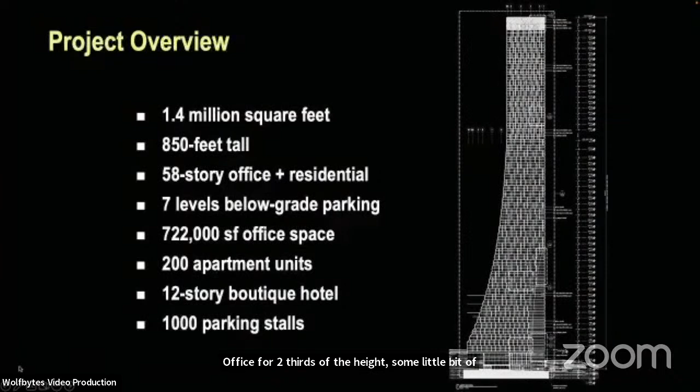The building itself is very large. In Seattle, it's the second tallest building. It's a mixed-use building with apartments on top, office for two-thirds of the height, a little retail in the base, and then 1,000 cars below grade, a huge parking garage. We could do a whole seminar on the below grade construction alone, but today we're going to focus on the above grade construction, which is the SpeedCore project itself.

How the building's organized is much like any other office building. Here you see a low-rise typical floor plan, where the red color is the core of the building, the structural backbone that braces it against wind and seismic loads. Let's talk in feet. The core itself is about 40 feet wide, and each of those red boxes is 40 by 30, with 3 of them, so 40 by 90 in totality at the base, housing the elevators, stairwells, and toilet rooms.

As the building gets taller, the floor plate shrinks, and with it, so shrinks the core, and so on to the top of the building, where we're left with a singular concrete box that's 40 feet wide and 30 feet long. This is how the building was to stack, apartments on top and office below.

That core by itself, at 850 feet tall, wasn't going to be stiff enough to brace the building. So in addition to the core, we introduced a series of outrigger trusses and belt trusses located about two-thirds of the way up, at the intersection of where the office stops and the residential apartments begin, at some mechanical floors. That was a convenient place to put these outrigger trusses.

The analogy I like to use for how the outrigger trusses work is like ski poles for a skier. If you're going down the mountain with no poles, you can make your way down, but it's a pretty wobbly ride. If you put the ski poles out, you feel a lot more balanced and stable. That's what these outrigger trusses and the columns that support them do, they add a lot of stability to the building. So that was the basic geometry of the building.

How buildings have been built for the last 30 years in many places around the world is using a reinforced concrete core surrounded by steel floor framing.

There's a long history as to why that is. We don't have enough time for that story today, but for most of my career, for the last 30 years, this is how we've been building high-rise buildings: concrete core, steel floor framing.

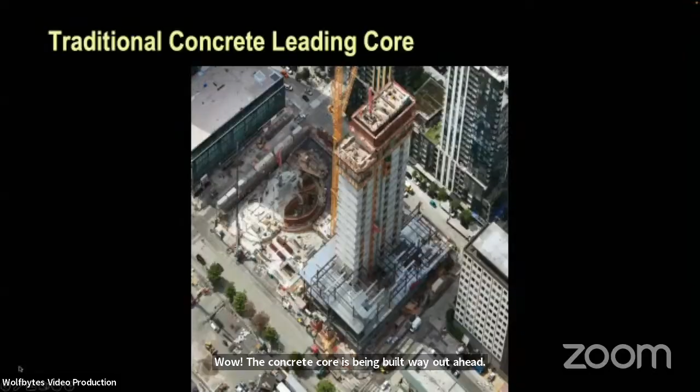That was the fundamental question of this project, because that time lag exists since the concrete formwork cycling and construction of the core can proceed at about one floor per week. That's about as fast as you can build it. The steel erection, on the other hand, can go 2 or 3 floors a week, much, much faster.

So there's this lag between when the steel begins erection and how far ahead the concrete needs to be. This was the question we asked ourselves: how do we address this and make the building go faster, squeeze that time lag out of the system with some other approach, and allow us to save several months on the schedule.

Confounding that concrete-ahead issue was this connection between these trusses and the concrete core. If you think about how to connect these very large steel trusses back to a reinforced concrete core, through the core, across the core, and then to the trusses on the other side, the amount of embedded steel needed in that reinforced concrete wall is substantial. The amount of time required and the complexity of assembling all that on site was substantial too, again confounding the construction process. So that's where we had this idea.

The idea was a composite plate shear wall system that was concrete filled. This was before we had the name SpeedCore. Actually, we borrowed this idea—we didn't really invent the technology. We borrowed it from a group that originally came up with a product in the UK called Bi-Steel.

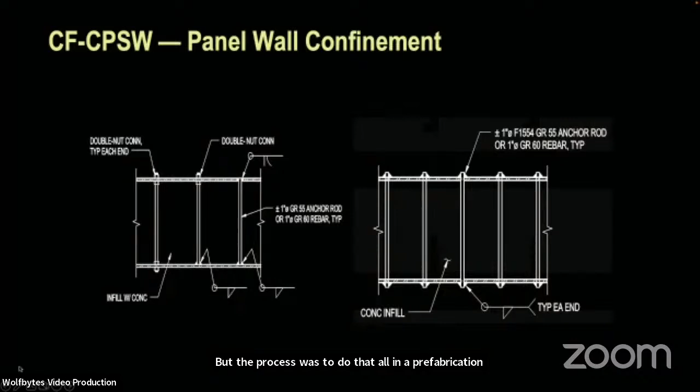The basic assembly you see here in plan: there's a steel plate, and they're interconnected by these tie rods. How you go about making that becomes really important because there are many, many pieces involved here, but the process was to do that all in a prefabrication plant—modularize it, prefabricate it, and then erect it in the field as you would stacking Lego blocks.

The panels themselves, as we imagined, were one story tall and one bay long. So in this case, 14 feet tall and 30 or 40 feet long, such that you could prefabricate them, put them on a truck, ship them to the site, pick them up with the crane and set them in place.

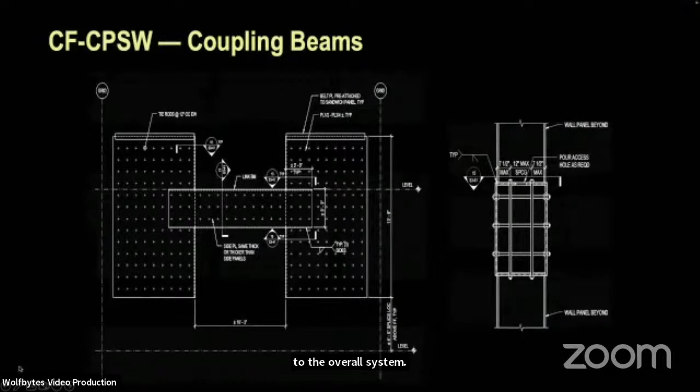Some of the other panels in the building needed doorways in them. So we thought about how we might create panels with doorways, and this was what we came up with: a dog-bone shaped or H-shaped panel that incorporated a link beam. As structural engineers, we were very concerned about how the link beam is constructed, how it will perform, and its contribution to the overall system. We wanted to control that very tightly, but how all that geometry came together was very important.

And then finally, how are we going to connect these pieces together in the field? How would we splice one panel to the next panel? Lots and lots of thinking went into all of these basic ideas.

About the time we were hatching this idea, Engineering News Record got wind of what we were up to, and they wrote an article—cover of Engineering News Record magazine, 'Calculated Risks.' The article was almost a dare, like: you think you're going to do something nobody's ever done before, and at this scale? Are you crazy? That was the gist of it. But we were undaunted, and we thought, yep, we're going to do it.

We have a proven team. We have confidence. And what they didn't know is we had about 10 years of research already in our pocket. We'd been working with the Charles Pankow Foundation and with Purdue on a series of research projects leading up to that moment, initially starting with Professors Bowman and Krager at the Bowen Lab at Purdue.

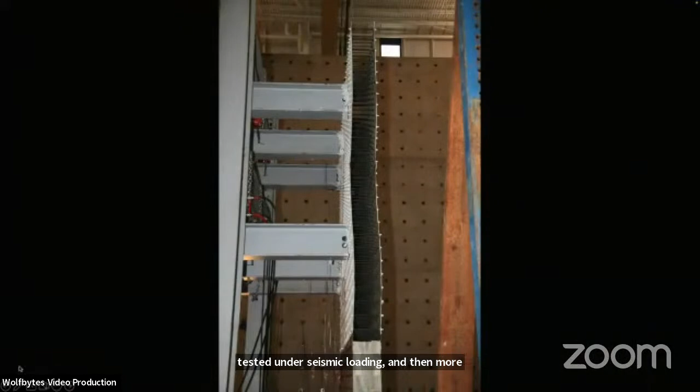In the early to mid-2000s, 2005, 2006, we started some testing of the parts and pieces, and here you see a 5-story tall T-shaped wall that we tested under seismic loading. And then more recently, testing a variety of loading conditions on these panels to the extent that I ran out of slides. Sorry, I hit one too many buttons. Brandon, if you could back it up to the very last slide.

Where we have kind of come to today is with Dr. Varma and his team. Starting about 7 or 8 years ago, we connected with Dr. Varma, who was also doing research in this particular area of composite construction. Here he is with his team, and we launched a whole other series of research projects seeking to better understand and better perfect the ideas of this system.

So what it is, this 58-story building. Why we did it is to go faster, to squeeze that lag out of the construction sequence with the leading core and the steel behind. And now we're going to tell you how we did it.

And how we did it was really founded in research that we did collaboratively with Purdue University, in particular with Dr. Varma and his team. So Dr. Varma, I'll let you take it from here.

Thank you, Ron. Thank you so much, Ron. It's a really tough act to follow. I guess I'm going to take your cue and I'm going to stand here and do the presentation.

Thank you so much for the invitation. It's a real pleasure for both myself and Ron to be here and provide this distinguished Paul Zia lecture. We are inspired by Dr. Zia and all the research that he has done over the years. In many ways, this research I'm going to talk about is an example of the kind of work that Dr. Zia has done throughout his career, which is an interaction, a collaboration between industry and academia. It allows for graduate students to work on real projects. It allows faculty like me to interact with engineers like Ron and understand what the real challenges and issues are.

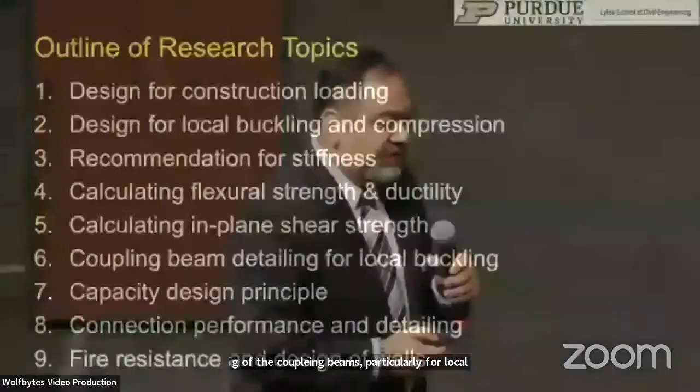Some of the topics I'm going to talk about are design for construction loading — this is going to be an important topic we'll see in just a moment — design for local buckling and axial compression, recommendations for stiffness, calculating the flexural strength and ductility, calculating the in-plane shear strength, which is going to be a big topic, detailing of the coupling beams, particularly for local buckling, a capacity design principle for the seismic design of the system, connection performance and detailing, and finally ending with the fire resistance design of this system.

So we kind of covered the waterfront on the various topics, and this is just a brief listing of some of the research topics we had to address in order to move forward with the system and bring it into reality. One of the important aspects of projects like this is that there is usually a peer review committee assembled in order to check what is being done, to provide review comments and so on. And usually the peer review committee is pretty daunting, and so was the case for the Rainier Square project. We had a very strong review team, and all the research that we did and presented was scrutinized and really needed in order to get the approvals and move forward.

Just to summarize, these are the key components of the SpeedCore walls. It's a pretty simple system. It consists of steel plates, tie bars, shear studs, and the concrete infill.

These are the four essential components, out of which the shear studs are actually optional. You may have a design that doesn't have any shear studs, which is really the case for Rainier Square.

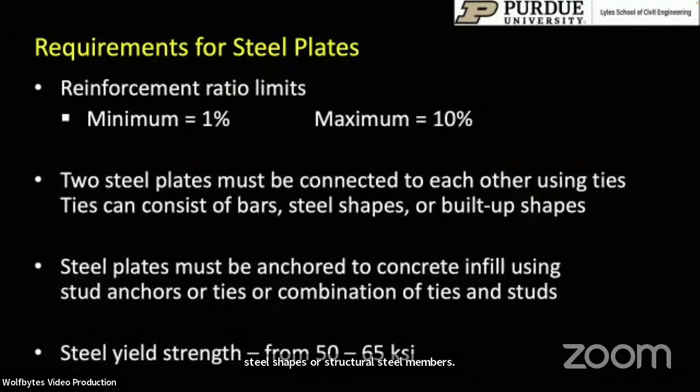We provided some requirements for the steel plates. The emerging codes from the 2022 version will tell you that you must have a minimum reinforcement ratio of about 1% for the steel plates, and about 10% is the maximum reinforcement ratio permitted. Both steel plates have to be connected to each other using ties, which can consist of bars or steel shapes or structural steel members. The steel plates must be anchored to the concrete infill using stud anchors or ties or a combination of both. That's a requirement of the system, and the steel yield strength can vary from about 50 to 65 KSI.

One of the key components of this system are the tie bars. There are hundreds of thousands of these tie bars, and they have to be connected to the steel plates. They serve multiple purposes: they provide stiffness and stability to the empty steel modules, which is an important criterion; they provide resistance to hydrostatic pressure when you cast concrete; they serve as anchor points for the steel plates after the concrete hardens; and you have to look at local buckling considerations. They provide structural integrity to the overall system, and if needed, they can provide out-of-plane shear resistance as well.

So the first topic I want to talk about is the design of this system before concrete placement, the topics of erection stability, transportation, handling, and so on.

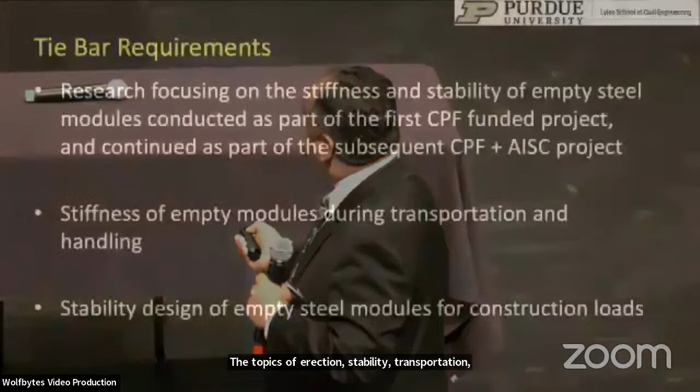Research focusing on the stiffness and stability of empty modules was conducted as part of the first Charles Pankow Foundation project, which Ron presented, led by my colleagues Professor Bowman and Kreger. We picked up the thread from them and started looking at what we could do to design these systems. We looked at the stiffness of the empty modules during transportation and handling, and more importantly, the stability design of these empty steel modules for construction loads.

A lot of this presentation, I'm going to talk about some of the research, but very briefly. I'll let you know the publication that has presented this research in excruciating detail. For example, this is the paper that talks about the steel modules and their behavior, stability, and design.

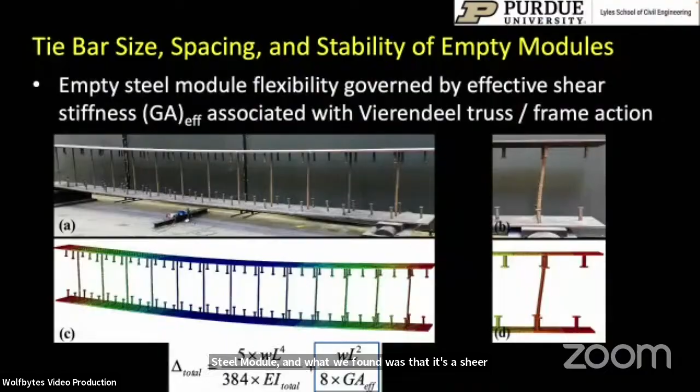What we found from our studies was that the empty steel module flexibility is governed by the effective shear stiffness, associated with Vierendeel truss or frame action from the tie bars. Looking at experimental data and numerical models, we developed equations for calculating the stiffness of the empty steel module. We found that shear stiffness was far more important than the flexural stiffness of that empty module.

We then started looking at the stability of this empty module for construction level loads, and we found something fascinating: the stability of this empty module is also fully governed by that same effective shear stiffness. This stability was found to be governed by shear buckling, and P critical for these empty modules was equal to GA effective, irrespective of length and end conditions. I still remember when we came up with this finding, I couldn't believe it for a moment, and I had to go back to all the theory to discover what was going on.

I called Ron and said, Ron, I think there's something interesting going on with this system. We were able to understand the stability of this empty module and how it was independent of length, independent of boundary conditions, and governed solely by the shear stiffness of an individual unit that was part of the system.

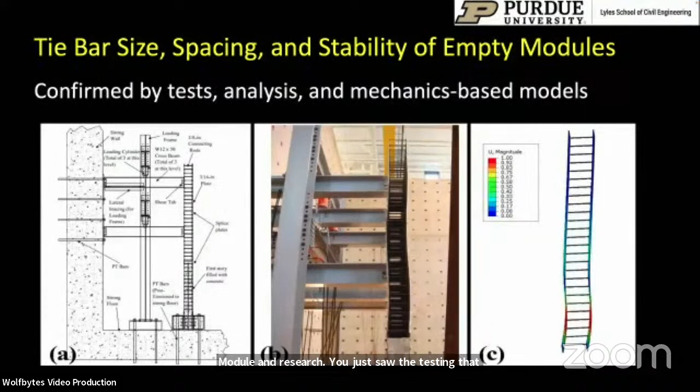So we were able to harness this understanding and develop equations for predicting the stability of this empty steel module. The research, combined with the testing you just saw done by my colleagues earlier, combined experimental data with numerical models, allowing us to develop simple recommendations for the design of this system as an empty steel module to have adequate stiffness and strength during concrete placement.

So this minimum GA effective is now part of the code recommendation. When the AISC 360 specification 22 comes out, you will see that it provides a tie bar spacing divided by plate thickness limiting equation, based on the shear stiffness of the individual empty module, which is a function of the flexural stiffness of the plates divided by the flexural stiffness of the tie bars. It's pretty fascinating.

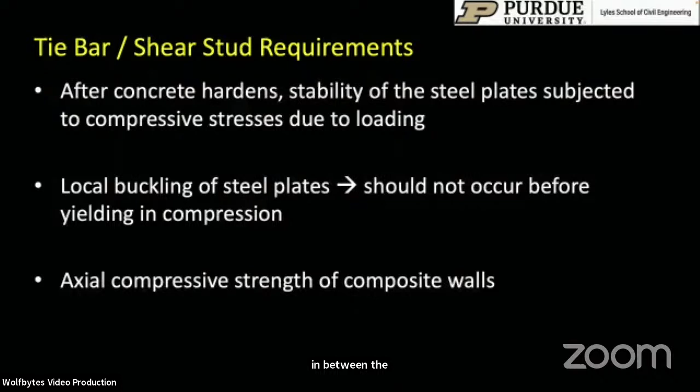But after the concrete hardens, the stability of the steel plates follows a slightly different behavior. When subjected to compressive stress, it's governed by local buckling that occurs between the ties or shear studs after the concrete has hardened. So local buckling of the steel plates should not occur before yielding occurs in compression.

So we decided that from a design perspective, we're going to make sure that these steel plates are compact or non-slender, meaning they will yield first and then local buckling will occur in compression. This research also led to the equations for calculating the axial compressive strength of the composite walls.

So this is the second topic I'm talking about, where we're looking at the same system, but now the concrete has been cast and hardened, and we're looking at local buckling of the steel plates between the tie bars. This work is summarized in another publication from the Journal of Structural Engineering that presents it in excruciating detail.

This research compiles all the experimental data from Japan, Korea, China, and the United States. We took all this experimental data and combined it with our own numerical finite element analysis and test data to look at what was causing local buckling of the steel plates, and what it would take to modify the slenderness of the steel plates so they would yield first and then undergo local buckling in compression.

We compiled all of this experimental and numerical data and developed a simple recommendation for the slenderness requirement of the steel plates in the post-concrete cast and hardening phase. These requirements, if met, give you a steel plate that is non-slender, meaning it will undergo yielding before it undergoes local buckling.

At the same time, we also provided an equation for estimating the F critical, or local buckling stress, associated with the steel plates, and equations for estimating the axial compressive strength of the steel plate after the concrete has been cast.

So we started off by looking at the detailing of the tie bars before the concrete has been cast, and then ended up looking at the slenderness of the steel plates after the concrete has been cast. Together, these two pieces of information provide us with pretty much all the information needed to detail the system: what should be the diameter of the tie bars, and what should be their spacing?

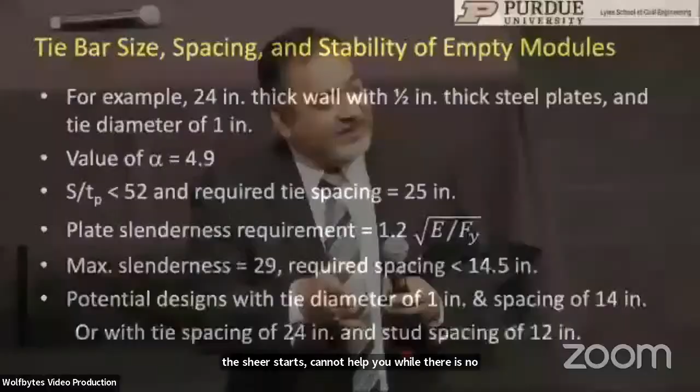If shear studs are used, they only work after the concrete hardens. The shear studs cannot help you while there is no concrete in the system, so you can add shear studs, but they'll only help after the concrete has hardened. Tie bars provide support both before the concrete hardens and after it as well.

Taking all of this information, I'm showing an example calculation for a 24-inch thick wall with about a half-inch thick steel plate and tie bar diameters of about 1 inch. Going through the calculations, you find that there are two design options possible.

One is with 1-inch tie bars at a spacing of 14 inches. This design would meet the requirements of the empty steel module before concrete casting, the requirements of local buckling and axial compression after the concrete has hardened, and at the same time meet all the minimum requirements for the steel and the concrete.

On the other hand, you could go with a design that increases the tie spacing to about 24 inches. That would reduce the number of tie bars by a lot, but you would have to provide shear studs between the tie bars at a spacing of 12 inches. So this gives the engineer multiple options to consider while detailing this system.

So we talked about the requirements for the steel plate, the minimum reinforcement ratio, the maximum reinforcement ratio. We looked at the requirements for the tie bars and also for the shear studs that are applicable before concrete casting and after concrete has been cast.

Finally, looking at some of the requirements for the concrete, we usually, in the design of this kind of SpeedCore system, use self-consolidating concrete with compressive strengths of about 10 KSI. This is commonly being used for most of the applications. There are no additional requirements for the concrete, and the concrete hydrostatic pressure when the concrete is cast is resisted by the steel plates and the tie bars.

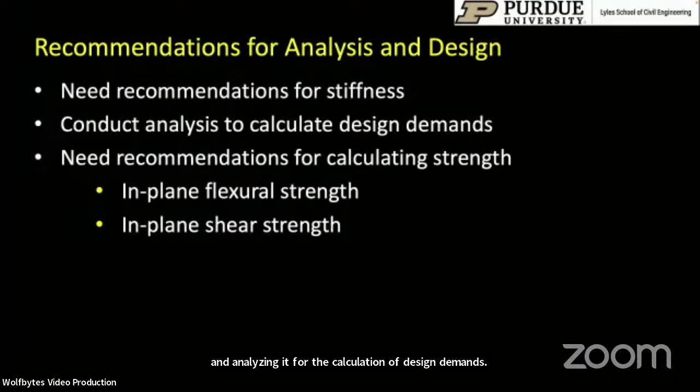So we need recommendations for the stiffness of this composite system, because we want to conduct analysis in particular to calculate the design demands, which means that we need recommendations for calculating the stiffness of that elastic model. And we also need recommendations for estimating the in-plane flexural strength and the in-plane shear strength of the system after the demands have been calculated.

So over the next few minutes, I'm going to talk to you about the recommendations for stiffness, how to calculate the in-plane flexural strength, how to calculate the in-plane shear strength, and also what will be the ductility of the system. All of this information is again summarized in a publication that you can download and look at from the ASCE Journal of Structural Engineering. I can provide a compilation of all the 9 papers that I'm going to talk about to the committee so that you can get access to them if you wish.

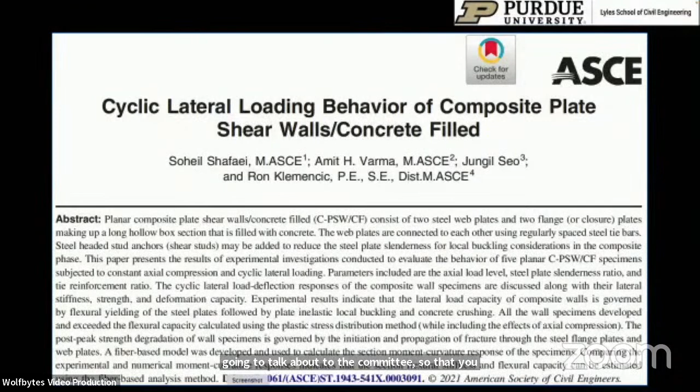So looking at the recommendations for stiffness, the stiffness recommendations should account for concrete cracking corresponding to the required strength level. We looked at the behavior of the system and we analyzed it for multiple loading conditions. And at the end of it, we looked at the section moment curvature response, particularly the secant stiffness corresponding to about 60% of the moment capacity of the cross section.

And based on that, we provided some simple recommendations for modeling the system while conducting analysis to calculate the design demands. This includes the in-plane flexural recommendation, EI effective. What you'll notice is that the concrete has a contribution of only 35%, acknowledging the fact that it's cracked concrete. We're providing a recommendation for the axial stiffness, which again is 0.45. These two numbers actually correlate very well with each other. They're based on the same amount of concrete cracking.

And for the in-plane shear stiffness, we recommended just using the full uncracked composite stiffness of the section, because it doesn't really matter for the applications that we are looking at. For high-rise building applications, the system is going to be flexure critical. So these are the recommendations for stiffness that we developed based on the research. And I'll show you some of the test data that validates these recommendations as well.

Now, of course, you can have a design where the extent of concrete cracking may not be as much as represented by these equations, in which case the code and the commentary both tell you that if drift governs or if the walls are significantly over-designed, you always have the option of doing an analysis to estimate the amount of cracking and then use an appropriate stiffness value for the composite system. But in the absence of better information, you can use these recommendations for the stiffness.

The concrete in compression reaches about 0.85 F prime C. You use equilibrium to calculate the plastic neutral axis and then the plastic moment capacity. Equations such as this are given for multiple different composite sections in the upcoming design guide.

When you combine this with axial compression, the in-plane flexural strength is calculated using the recommendations typically used for composite columns or composite beam columns, which corresponds to the axial compression point A, the flexural capacity point B, the balance point D, and point C, which has the same moment capacity as point B.

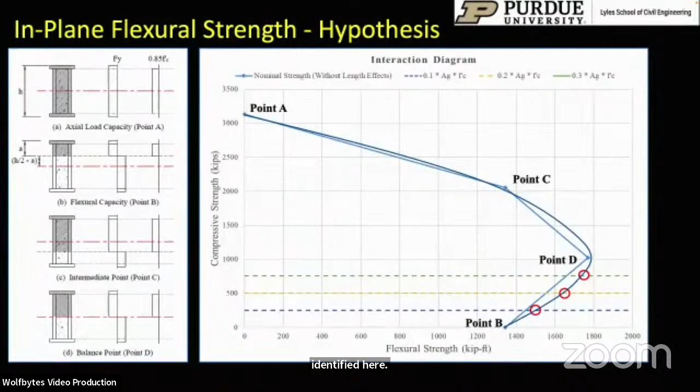You can develop the PM interaction for this composite section, similar to how you do it for reinforced concrete, but using composite section principles, identified here. So depending on whether you have an axial load in compression of about 10%, 20%, or 30%, you can have different in-plane flexural capacities.

So having looked at these recommendations for stiffness and strength, we all want to know whether this is really based on test data and validation or not. The experimental data plays an important role in all of this research.

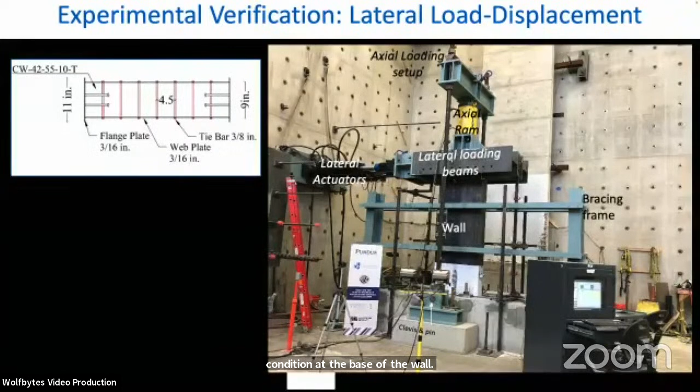So we developed some specimens that were about 1/3 scale representations of the full-scale steel plate composite walls, and we tested them in our laboratory under axial compression and cyclic lateral loading using actuators. You're also noticing the fixed condition at the base of the wall, and this is the location where plastic hinging will form.

So this gives us a good sense of what the lateral load versus displacement response of this system is going to be, experimental data that you need to show in order to validate the behavior of the system. I also have some photographs.

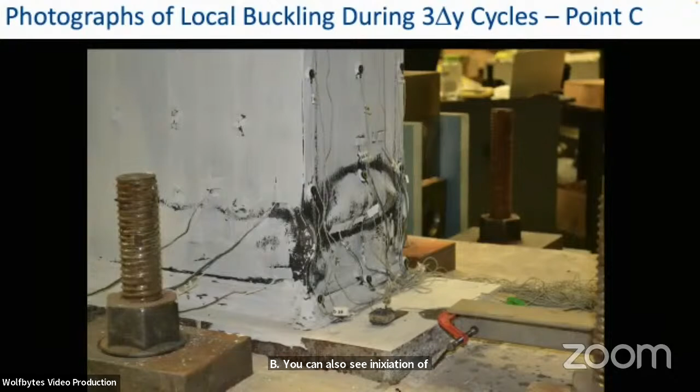So the experimental behavior of this system is very important to understand as well, and the experimental data does provide that information to us. Taking this experimental data, we were able to develop the plastic hinge versus rotation response.

For example, here is the experimentally measured moment curvature response, shown with dotted lines, and the solid black line is a simple fiber analysis of the cross-section, which compares very well with the experimental data. In fact, we could take that section fiber analysis and identify the occurrence of various limit states.

For example, when does the concrete reach a strain equal to 0.003? When does the steel reach a strain in compression equal to 2 epsilon y? We were able to identify the occurrence of various events, and we found that the peak strength was reached when the steel in compression reached a strain of about 2 times the yield strain. We were able to learn this from the experimental data.

Similarly, we compared the stiffnesses that we got from the experiments with the recommendations provided in AISC and also the EI effective equations you saw earlier. We were able to verify that those recommendations for the stiffness were indeed based on experimental data. From all of this experimental research, we were also able to look at the rotation capacity or the ductility of this wall at the base plastic hinge.

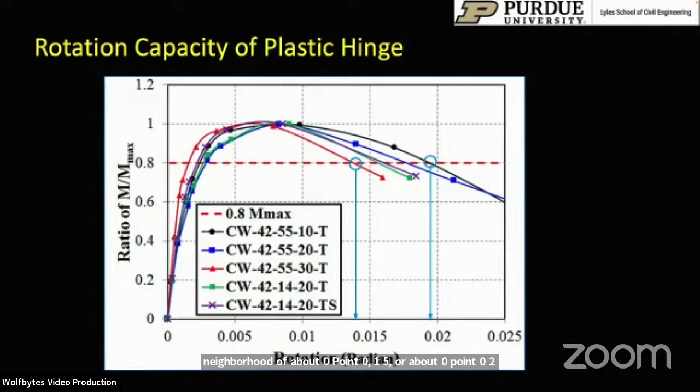I'm showing you here results from about 5 different tests showing the ratio of the moment with respect to the plastic rotation capacity of the hinge at the base, showing rotation capacities in the neighborhood of about 0.015 to 0.02. And as the axial load increases, the rotation capacity decreases ever so slightly.

So we were able to use all this information from the research in order to verify the equations for stiffness and the equations for strength. AISC now recommends the plastic stress distribution and also permits the use of fiber analysis to estimate the in-plane flexural strength of the wall specimens.

It tells you that if you have axial load, you need to account for that, and it gives you equations for estimating the flexural stiffness of the wall specimens, based on this research as well.

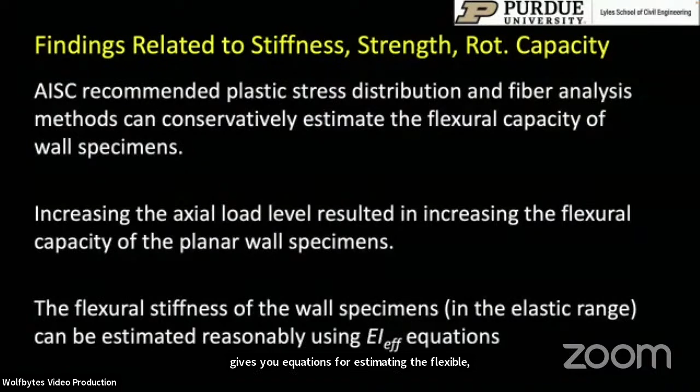In the commentary, it points out that the plastic rotation capacity of the planar wall specimens was in the range of about 1.5 to 2% in radians, and the moment curvature responses compare very well with the fiber-based models, with some more recommendations on how to calculate the in-plane flexural strength.

So this is really good. We talked about how to detail the cross-section, we talked about how to estimate the stiffness, and then, of course, the estimation of the in-plane flexural strength.

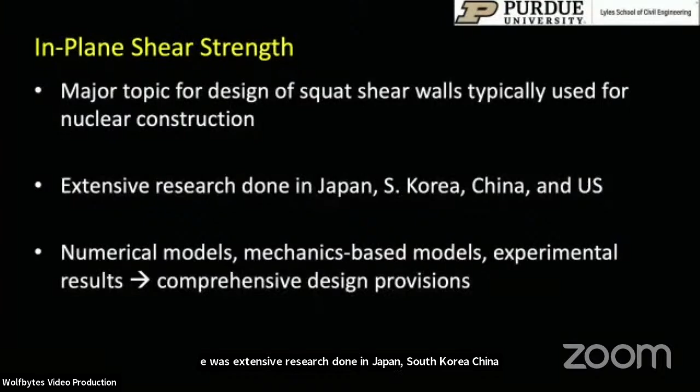But then, of course, there's the big question of what is the in-plane shear strength of this composite wall system. This was a major topic for squat shear walls, typically used in nuclear construction. I'm not going to talk about that here today, but there was extensive research done in Japan, South Korea, China, and even the United States looking at the in-plane shear strength of this system. As part of this research, we developed numerical models, mechanics-based models, and experimental results, which led to comprehensive design provisions.

I'm going to touch upon that briefly, there's a publication that talks about this in detail, the in-plane shear strength of this particular system. What it comes down to is that the behavior is governed by mechanics, the orthotropic composite mechanics of this system. When you have this system subjected to pure in-plane shear, the tension component causes cracking in the concrete, and the compression is resisted by that cracked concrete. Together, you get an orthotropic system with zero stiffness contribution from the concrete in the tension crack direction and almost complete stiffness in the compression axis.

We were able to put all of this together into a simple mechanics-based model that resulted in an in-plane shear trilinear curve that explains the in-plane shear behavior of this system, which provided equations for the stiffness of the composite section before cracking, stiffness after cracking, and the in-plane shear strength, which corresponds to the limit state of von Mises yielding in the steel plates, resulting in this equation for calculating the in-plane shear strength.

This equation was verified through large-scale testing done in our laboratory. Here I'm showing you a comparison of the trilinear curve with the backbone of the experimental data that we obtained from the in-plane shear behavior of this stocky or short squat shear wall.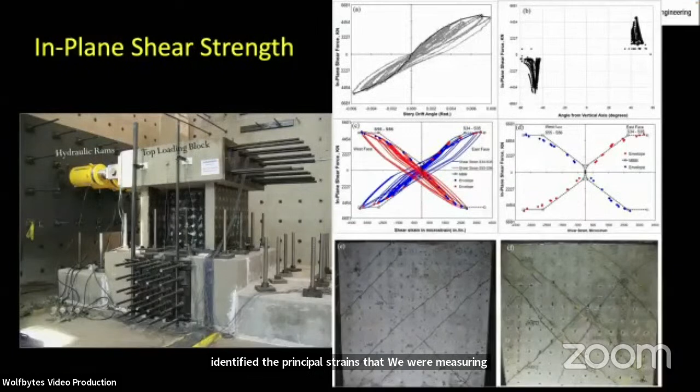Using this equation for the in-plane shear strength, we were able to collect all the experimental data from Japan, China, South Korea, and of course the United States. And we were able to develop a simple equation for conservatively estimating the in-plane shear strength of these walls. These equations are now included in the AISC specification, and this shows you the comparison of the experimental database with that.

All right, so we covered quite a bit of material. We got a chance to look at how to detail this section, how to model its stiffness, how to calculate its in-plane flexural strength, and also its in-plane shear strength. But really, we're talking about a system.

This slide is summarizing that this system can be coupled or uncoupled, and the same system can be coupled in one direction and uncoupled in the other direction, particularly when you're looking at high-rise applications. So I'm going to talk a little bit about the coupled system now and the coupling beams, which are also composite concrete-filled steel tubes.

So you're getting a chance to see here the composite wall and the coupling beams, which are also concrete-filled steel sections. The coupling beams are identified here as rectangular box sections, and a picture of the walls is shown here.

This is a segment or a portion of the coupled wall system, which is quite representative of the modules that will be built and shipped to the site for assembly, stacked on top of each other in order to make the system, which Ron is going to show in just a few minutes here.

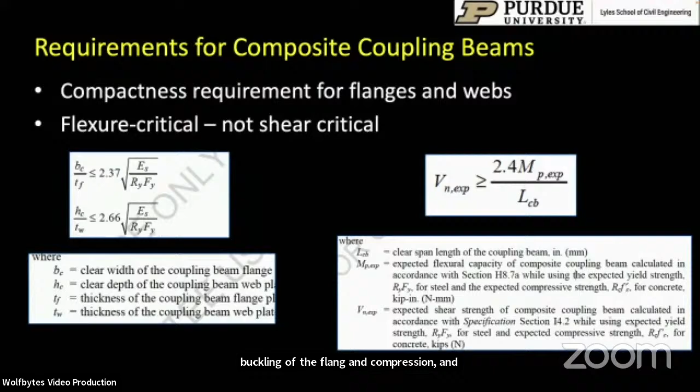Besides that, those composite coupling beams have to meet certain compactness requirements, particularly for the flanges and webs. They are required to be flexure critical. This is a little different from the coupling beam requirements used for reinforced concrete systems. We require these composite coupling beams to be flexure critical, not shear critical, meaning their shear strength has to be greater than their flexural strength multiplied by 2.4 divided by the length of the coupling beams. There are also compactness requirements for the flanges and webs of the coupling beams that take into account local buckling of the flange in compression and web shear buckling of the webs. So all of these requirements are now included in the seismic provisions.

Talking about the seismic provisions, most of you are familiar with the seismic design factors R, omega naught, and CD. R is a response modification factor used to reduce the seismic design forces to an elastic level to account for the inelastic behavior and ductility of the structure. Omega naught is the overstrength factor used to estimate the inherent overstrength in the system. CD is the displacement amplification factor used to calculate the inelastic story drift from the calculated elastic story drifts. These R, omega naught, and CD factors are going to play an important role moving forward in our discussion.

ASCE 7 provides these seismic design factors for most steel, concrete, and composite systems. For the uncoupled system, that is only with shear walls and no coupling beams, ASCE 7 includes values of R equal to 6.5, omega naught of 2.5, and CD of 5.5. On the other hand, for the coupled system, ASCE 7 did not include any values, which meant we had to develop the factors and provide the research backing to establish R, omega naught, and CD for the coupled system. We found that in ASCE 7, the largest value of R for any system is 8, so this became the target for the coupled SpeedCore system.

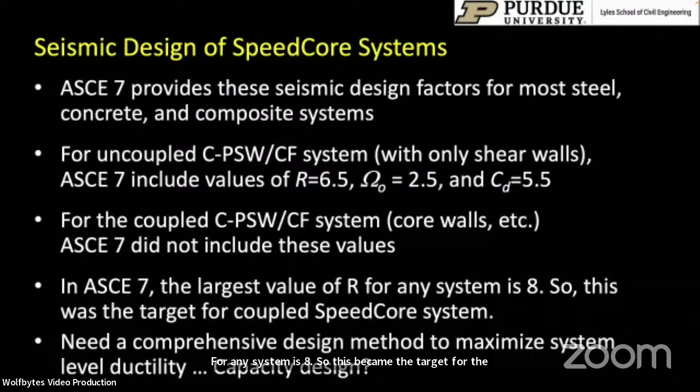We needed a comprehensive design method to maximize the system level ductility, which gave us an opportunity to develop a capacity design for the system. How often does that happen? We have summarized this capacity design principle for the coupled composite plate shear wall system in another publication in the Journal of Structural Engineering.

We identified two sources of inelastic deformations: you can form flexural plastic hinges at the ends of coupling beams, and you can also form flexural yielding at the base of the walls. Our preferred inelastic mechanism was to form flexural plastic hinges at the ends of both coupling beams and at the base of the walls. But we decided to implement a strong wall, weak coupling beam design approach to size the composite members. This means you develop extensive plastic hinging in most of the coupling beams along the height of the structure before you get significant yielding and fracture at the base of the walls. The coupling beams can even fracture while the walls continue to provide inelastic behavior.

So what does this really look like? I'm showing you here the capacity design principle for this coupled SpeedCore system. Point A corresponds to your ELF, your equivalent lateral force level. We're designing the coupling beams to reach the capacity at this point, but the walls are not designed for the forces corresponding to point A. Instead, the walls are designed for the capacity corresponding to point B, where we get plastification of all the coupling beams along the height of the structure. So the walls are designed to be stronger, designed to develop the plastic mechanism in the coupling beams.

Eventually, if you keep pushing on the system, you reach point C, where you form plastic hinges at the base of the walls. By the time you get to point D, you start getting fracture in the coupling beams and eventually fracture in the walls. This was done to distribute the plasticity along the height of the structure, because that gives a more ductile system, allowing us to reach an R factor of 8 rather than 6.5, which is used for the uncoupled system. We implemented this capacity design principle to design several archetype structures. I'm showing you here the pushover behavior from a 2D finite element, nonlinear inelastic finite element analysis of this coupled core wall system, where point A again corresponds to the ELF level load.

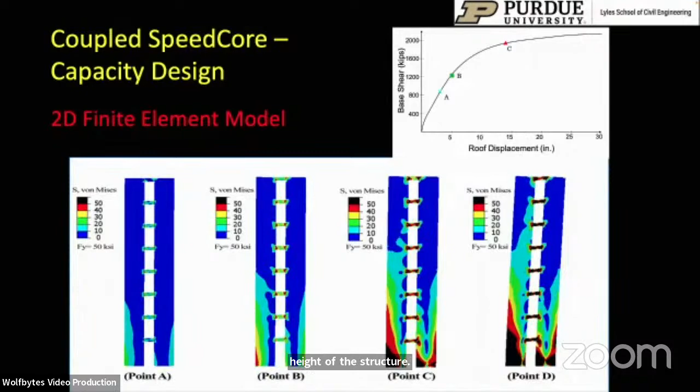Point B corresponds to the spread of plasticity along the height of the structure in the coupling beams, and point C corresponds to the formation of plastic hinges at the base of the walls.

But this is just static pushover behavior. We really wanted to see the behavior of the system under dynamic earthquake loading, so we did a series of nonlinear time history analyses.

I'm showing you here the response from one of those earthquakes we were considering, the Superstition Hills earthquake, on about an 8-story structure. We scaled the ground motion to be a design basis earthquake, and what we found was that you were getting some yielding in the coupling beams along the height and some yielding at the base of the walls, which is what you'd like to see for the design basis earthquake.

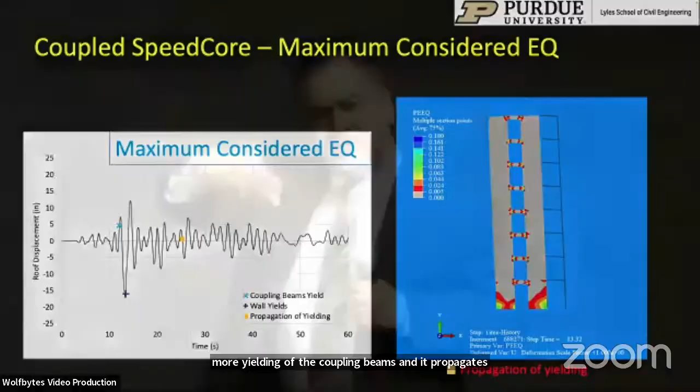When you make the earthquake larger, by changing it to the maximum considered earthquake, the response shows more yielding of the coupling beams, and it propagates along the height of the structure, which is what we want. The more you dissipate plasticity along the height of the structure, the better the earthquake behavior, the better the ductility, and the larger the R factor. So we were able to achieve that by spreading the plasticity along the height.

You do still get some formation of plasticity at the base of the walls. But when you consider the failure level earthquake, all the events we had identified occurred in the right sequence: yielding of the coupling beams, followed by wall yielding, propagation of yielding along the height of the structure, initiation of fracture in the coupling beams, and then finally total fracture of the coupling beams along the height of the structure. That was the seismic response programmed into the system by the capacity design principle, and it gives us exactly that.

This is a video that actually shows the seismic response of a 12-story structure, where you can see the ground motion tracking through and the response of the system. All of these red spots are the occurrence of yielding along the height of the structure. There's the big pulse that causes all kinds of yielding along the height of the structure.

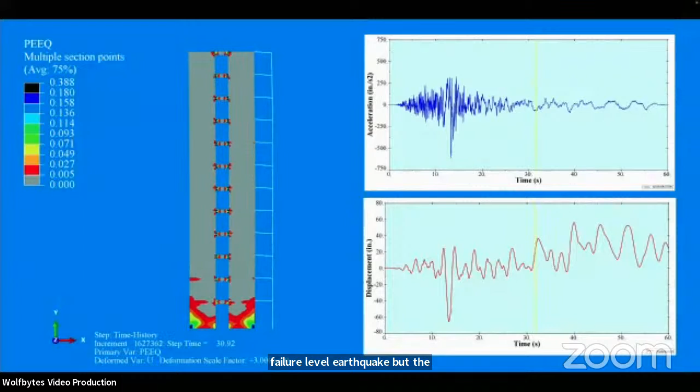When the shading turns black, that's when you're getting close to fracture in the coupling beams, which has occurred for some of these coupling beams along the height. Remember, this is the failure level earthquake, but the system remains stable and survives the entire failure level earthquake, with some occurrence of fracture initiation at the base of the walls at the end.

So we conducted FEMA P695 studies, which is the methodology to develop the R, omega naught, and CD factors for the system. Using the capacity design method, we developed archetype structures: 8, 12, 18, and 24-story. All of these archetype structures were reviewed by Ron and his team, who made sure that we had representative designs of what would be built in the real world.

These were modeled using 3 different independent approaches by teams at Purdue University and at University at Buffalo, and we did hundreds of thousands of nonlinear time history analyses for 44 scaled ground motions with increasing intensity. We conducted a statistical analysis of the results from the FEMA P695.

The results from all of that are summarized in this publication. Eventually, all of this research was presented to the ASCE 7 committee, to the Seismic Structures Committee, and also to the Provisions Update Committee, which reviewed and provided comments and accepted it into ASCE 7 with an R factor of 8. That's the victory. The CD factor of 5.5 and omega naught factor of 2.5 were given based on the studies we had conducted.

The seismic design and detailing requirements for this system are provided in AISC 341, an upcoming publication, and the performance requirements for the coupling beam to wall connections made in the system level analysis were based on what we saw from the nonlinear time history. Eventually, the required coupling beam rotation capacity was 0.03 radians.

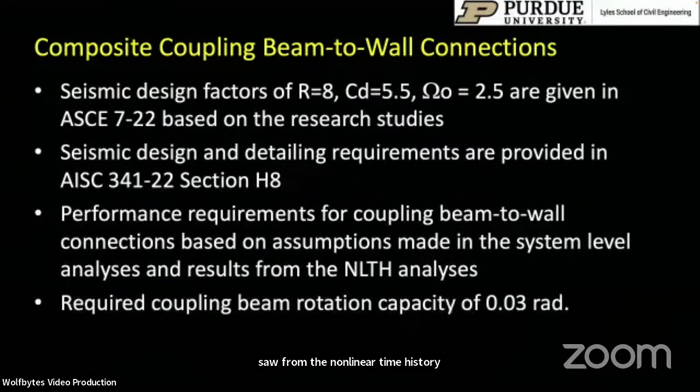This is the requirement for the connection between the coupling beam and the wall, which brings us to the topic of how do you connect these composite coupling beams to the wall connections. So we looked at several designs for the composite coupling beam to wall connections. We had them reviewed by practitioners, Ron's team, and the fabricators. Everybody looked at them and told us which ones were good enough to be considered realistic representations of design.

Typically, the coupling beam flange plates are penetrated into the walls, and I'll show you a picture of that in just a moment. The performance requirement for this coupling beam connection is that it should have a rotation capacity of about 0.03 radians before the moment capacity drops below 80% of MP. So that's the performance requirement for this coupling beam to wall connection.

We looked at many different connection types. I'm showing you only two here on this picture. In both cases, the coupling beam flanges are going into the walls and they're CJP welded to the plates of the composite wall. There are two different options for the coupling beam webs. Here, the coupling beam web is continuous—it's actually the same plate as the web for the composite wall. And in this one, the coupling beam webs are lapped from the outside and fillet welded to the plates of the wall. So two different connection types that we are looking at here.

Of course, we looked at many more than these 2 different connection types, which I'll summarize in the end. We conducted experimental investigations to make sure that these connections, when designed, would have the rotation capacity of at least 0.03 radians. I'm showing you here the test setup, which includes the actuators, the coupling beam segment, the wall, and then, of course, the connection between the coupling beam and the wall right here.

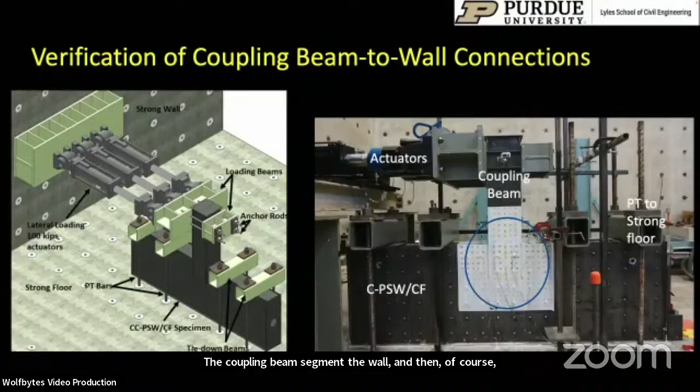We took the envelopes of the moment rotation responses and plotted them so that we could look at the rotation capacity of the connection. For example, this connection had a rotation capacity of 0.037 radians, which corresponds to the reduction in the moment capacity of about 80% of MP. So we were able to identify the performance of these connections.

As I told you, there were 6 different connections that we've tested, and all of these have passed the requirements that we've placed on them, which is a rotation capacity of 0.03 radians. You can look at the details of these connections in some of the publications.

And we come to the last and perhaps the most important topic for this composite SpeedCore system, which is: what is the fire resistance? Because the steel plates are located on the outside, there are questions about what will be the fire performance of this system. So we focused on unprotected composite walls. Between our discussions with Ron and his team, we identified that what was really going to make this system efficient was if it could be used without any additional fire protection. So that's where we focused.

We conducted experimental tests, which included looking at the thermal behavior and the structural behavior to both uniform and non-uniform heating. We developed numerical models that were benchmarked to the experimental data and then used to conduct parametric studies. At the end, we were able to develop wall axial strength equations as a function of temperature and fire resistance rating in hours for the system, and also provide recommendations for steam vent holes for the system.

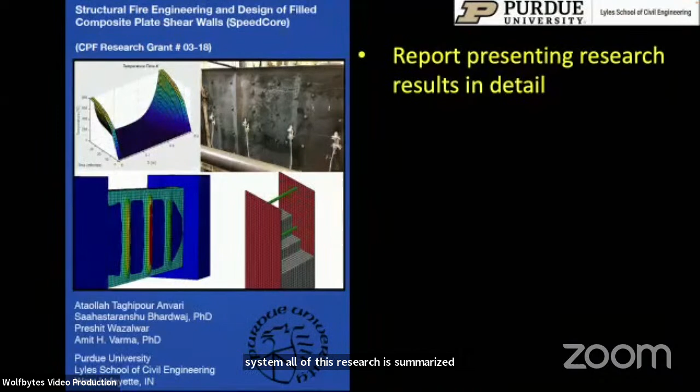All of this research is summarized in a Charles Pankow Foundation report that you can download. It's available free on the web, and it talks about all the experimental and numerical results. I'll summarize them rather quickly.

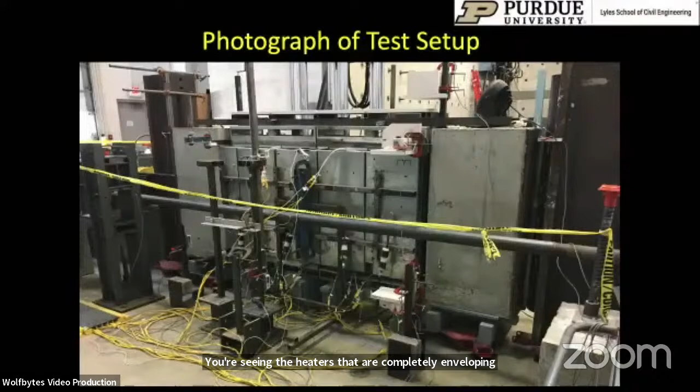And this is a photograph of the experiment in operation. You can see the red hot portions where the heaters are heating up the wall specimens. It's almost red hot behind the heaters. You're also seeing some moisture coming out from the concrete as well.

The typical experimental results—I'm showing you some of the thermal results. The surface temperature of the steel reaches about 1000 degrees centigrade, which is what you'd want to see in a fire test. But the thermal gradient through that composite section is shown here: while the steel surface temperatures are about 1000, towards the center of the wall the temperatures are much lower. And this was only a 9-inch thick wall.

That's not very thick. It's actually a 1/3 scale model representation of the wall. So we found that the concrete provides a very strong heat sink for the system, to the point where, in spite of all the load that had been applied to it, the specimens never failed and had fire ratings in excess of 2 hours for the 1/3 scale 9-inch thick specimens.

Here are some photographs of the specimens. You can see the local buckling that has occurred between the tie bars in the steel plates. That's a close-up showing the locations of shear studs and tie bars and the local buckling in between.

Using these experimental results, we were able to develop 3D finite element models that were benchmarked to the experimental data. These benchmark models were used to conduct parametric studies for a wide range of parameters, including geometric parameters, material parameters, and boundary conditions as well.

The results from these numerical parametric studies are summarized in a publication that has just become available. This came out 2 days ago. But you can download it to look at it. I can make the slide move forward.

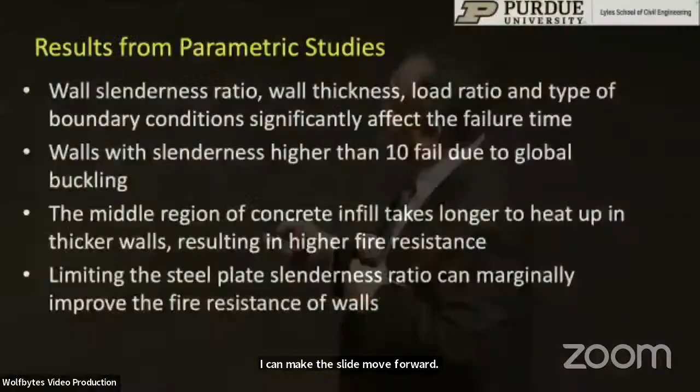There we go. The results from the parametric studies were as follows. We found that the wall slenderness ratio, the wall thickness, the load ratio, and the type of boundary conditions significantly affect the failure times. Walls with slenderness ratios higher than 10—meaning the story height divided by wall thickness ratio greater than 10—fail due to global buckling.

The middle region of the concrete infill takes much longer to heat up in thicker walls, resulting in very high fire resistance, and limiting the steel plate slenderness ratio can marginally improve the fire resistance of the walls. Next slide, please.

We also conducted studies on non-uniform or one-sided heating, which we found results in thermal bowing, some second-order moments in the walls, and some eccentric moments as well. Walls with height-to-thickness ratios greater than 20—meaning story height divided by wall thickness ratio greater than 20—

and subjected to one-sided heating need fire protection on the exposed surfaces. But this never happens because of the thicknesses that are generally used in construction. Typical wall story height to thickness ratios are within 5 to 10. So this is just providing a theoretical limit on how far you can go.

And what we concluded was that typical SpeedCore wall designs do not need any fire protection. They can be designed unprotected.

You can download the program and run various simulations for the fire resistance of your wall and check its design. And we used all of these results in order to develop the fire design equations.

For example, we developed equations for calculating the compression strength as a function of temperature. P-not is the compressive strength of the cross section. PET is the buckling strength of the wall. Together they give me the axial capacity of the wall as a function of temperature. I can calculate the temperature from the fire and estimate the axial load capacity.

So there are equations based on test data and numerical models that can be used to calculate the strength of the wall. Or if you are just looking for the fire resistance rating equation, we've developed that as well, as a function of the applied loading, the H/TW ratio, which is an important parameter, and the thickness of the wall.

Together, including all of these parameters, you can calculate the fire resistance rating for the system, which is generally in excess of 3 to 4 hours.

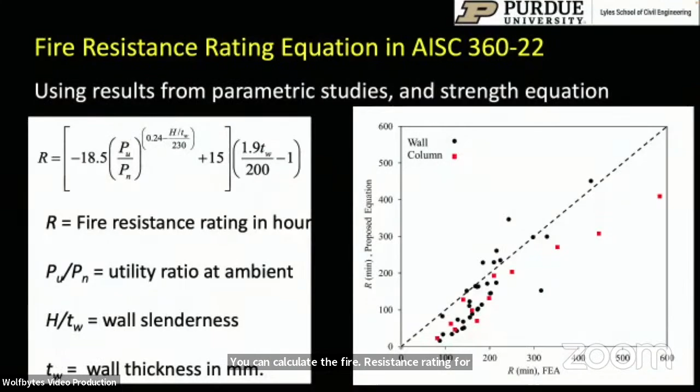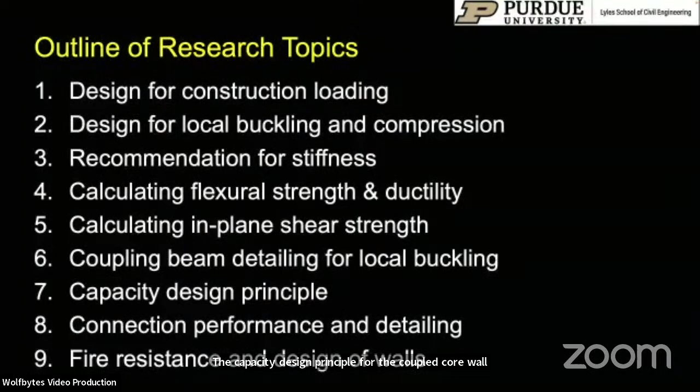So that's a summary of some of the topics that we addressed as we were generating this knowledge base for the system to be reviewed, including design for construction loading, design for local buckling and compression that results in the section detailing, recommendations for stiffness, calculating the in-plane flexural strength and ductility, calculating the in-plane shear strength, detailing of the coupling beam to prevent local buckling, the capacity design principle for the coupled core wall system, the coupling beam to wall connection performance and detailing, and finally the fire resistance and design of the walls. So those were some of the topics I wanted to summarize to you today.

I wanted to check that I'm over or under my time limit. So, Santiago.

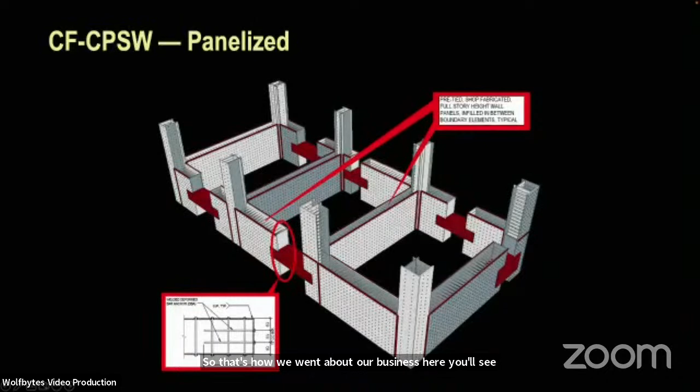Here you see 2-story tall box columns with single-story wall panels, and this was the strategy going in. Not something informed by the engineer, but something really demanded by the erector, because he thought this was going to be the best strategy to make the building go.

Engineering-wise, in this particular building, we had to size things - well, how big are they? This particular building, given its location in Seattle, its unique shape, and its slenderness, oddly, was controlled by wind and not earthquakes. Even though we're very close to the Juan de Fuca Fault, and earthquakes are prevalent in Seattle, this building was controlled by wind design, and the stiffness of the building was imperative. That's what set the thickness of the walls - not the strength of the building, the stiffness of the building.

So the walls here varied from 45 inches thick at the base, very thick, to 21 inches at the top, and you can see we had 1-inch diameter rods at 12 inches on spacing throughout everywhere. That was the cross-tie rods.

When we started the design of this project, we were about a half, maybe not even a half, maybe a third of the way through the research program with Dr. Varma. We had results from Krager and Bowman, and some initial results from Dr. Varma, but we were early days. We had enough confidence to proceed with the system, but there were still years of research yet to come to improve upon the system and understand it better.

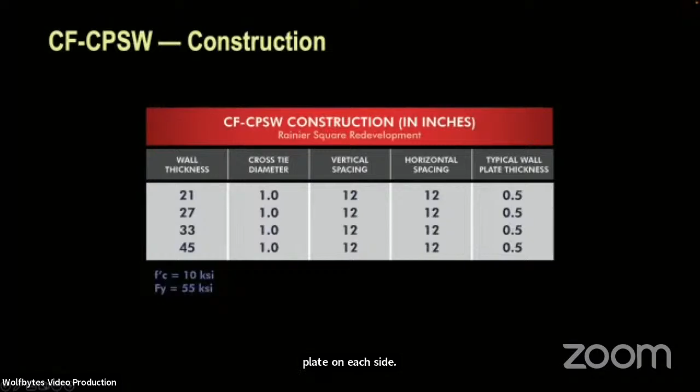There's 240,000 rods, each connected to a plate on each side. Do the math: 240 times 2 is 480,000 connections. How we go about making those is really, really important. If we save 1 minute per connection times 480,000, that's a lot. So we worked with the erectors and the fabricators to think about how that was all done.

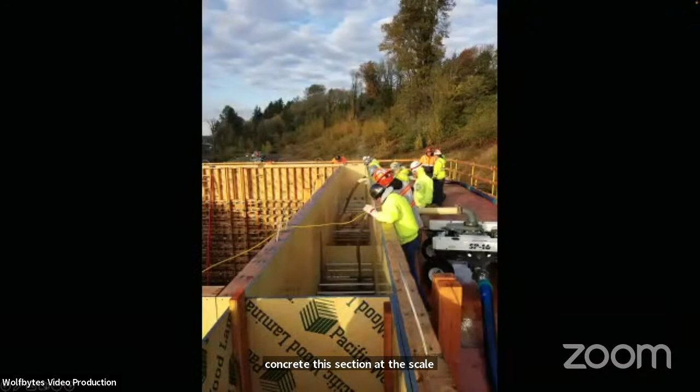The purpose of this mock-up was to understand the concrete we intend to put inside of it. How are we going to place it? How is it going to be consolidated? How is it going to flow? What are we going to end up with when we try to concrete this section at this scale? Here you see the crew out there trying to pump concrete from above. We mocked up the cross-tie rods with PVC pipes.

The purpose of all of this was so that when we were done with this mock-up, we could take it apart and look at it. That's why this formwork was wooden, and that's why the tubes were plastic instead of steel. Ultimately, that's what we did. We cast the concrete and then took everything away to prove to ourselves that the mix design we had collaborated on with the ready mix producer was placeable, flowable, and would consolidate, and that placing the concrete from above and letting it free fall 14 feet wouldn't cause segregation problems, that in fact the concreting operation would be a success.

The good news is it was a huge success. Everything looked perfect when we got done peeling the wall away. We learned many, many things. One thing we didn't think about, but learned from this mock-up, was that when we went into the field to make these for real, we needed to make sure all construction workers near this wore gloves and stayed away from it because of the heat of hydration. The concrete got to about 160 degrees in the heat of hydration, which transmitted through the steel plate. So if you touched the steel plate after we cast the concrete, you'd burn your hand, just like touching the top of a stove.

And that's the purpose of all those holes there, is to allow that concrete to flow.

We put all this stuff on a truck in Portland. Not a small task to think about interstate shipping with wide loads. These are 14 feet wide panels. The good news is both Oregon and Washington defined wide load versus extra wide load at 14 feet, so we were wide, not extra wide.

Why is that important? If you're extra wide, you need a police escort. At 14 feet, we were wide. We needed a lead car and a trail car behind the truck, but we didn't need to inform the state patrol. We could just roll it down the road. There's all sorts of lessons like that we learned or had to solve along the way, but they're all solvable.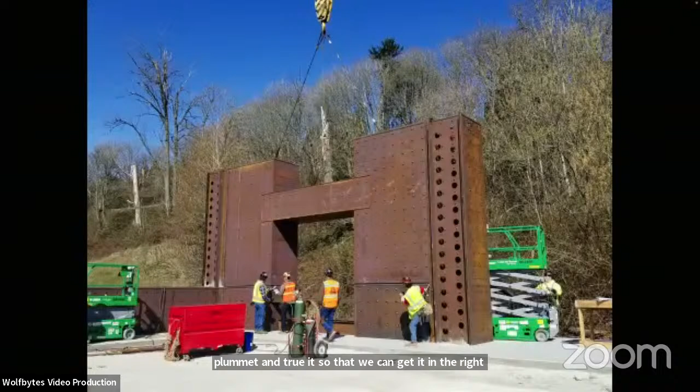All right, so here's some more panels on the truck. And then we brought them to that same yard in Seattle and had the raising gang, the erectors who are actually going to build the building, come and practice. How do I tip this piece off the truck? Once I have it on the hook and swing it, how does it behave in the wind? How do I set it and plumb it and true it so that we can get it in the right place? You can see these panels are not small, right? These are full scale, one story tall with a splice there.

And then we also experimented in the same mock-up with the splice itself. The details of the splice is probably a two-hour seminar in and of itself. What we did here on this project is all of the field splices were welded.

Again, a product of a conversation with the erector. We said, we can weld, we can bolt. Here's a picture, a couple pictures of a welded connection. Here's a couple pictures of a bolted connection. Which do you prefer? We can engineer either. In this case, the erector said, I much prefer to weld.

And the reason he much preferred to weld: one, he had the crew to do it, and two, he felt that the field fit-up and the ability to deal with small variations in plate trueness would be much easier to handle with welding than with bolting. He was much more worried about misalignment of bolt holes, and there would have been hundreds of thousands of bolts involved in splicing these sections together. So back-reaming hundreds of thousands of holes versus taking up small variations in plate due to warpage with the welding was a far better proposition in his eyes. So we chose to weld.

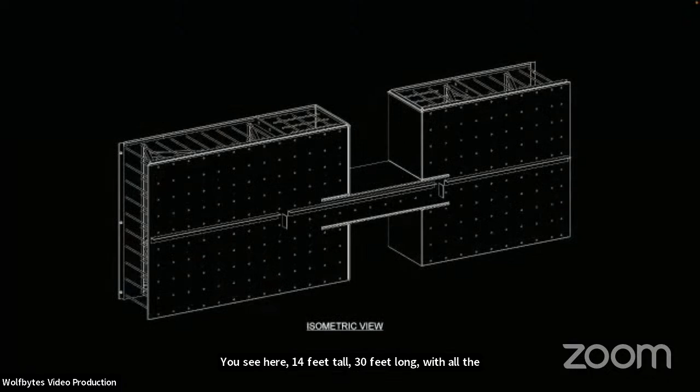When you look at this closely, you see a couple of other things. You see shear tabs that are welded in place to the panel to accept the incoming floor framing. You see the deck ledger angle already installed on the side of the panel to accept the incoming metal deck. So everything that would normally be put in the field on a reinforced concrete wall with embed plates and field welding and field attachment, all that was done in the shop.

So everything to receive all the incoming parts and pieces was all shop fabricated and then trucked to the site, including mechanical penetrations for ductwork and piping. All of this was coordinated on paper, in the CAD, in the Revit model ahead of time, so that all the penetrations could be prefabricated into the panels in their right location, in the right size, and all that work done in the shop.

So ultimately, all these panels started showing up on site. I had the unique, kind of crazy coincidental vantage point. That picture's from my office window. The project was literally right outside of my office. I could look outside my window every day throughout the construction of this project and see it from the very beginning to the very end, about 60 feet away from me.

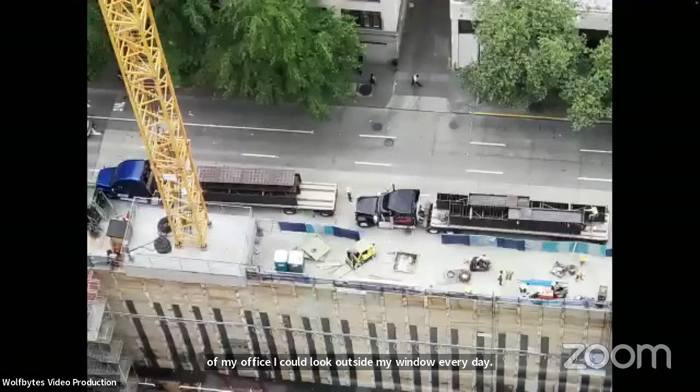So the trucks rolled up and we started hoisting the panels into the foundation. And then the first thing we had to do was connect it to the base.

In the case of Seattle, we're blessed with very good geotechnical conditions in the downtown area. We have very highly over-consolidated glacial till, which has very high capacity. Back in the Ice Age, the glaciers were in Seattle and consolidated all this soil, so it has huge bearing capacity, which allows us to found most of the buildings in downtown on a shallow mat foundation. So that's what this is.

It's a mat foundation, 12 feet thick. So me on top of me, thick, that's how thick the mat is. That's what this core was anchored into.

And so how we chose to go about anchoring it was a series of what we called stanchions or columns. You see them like a picket fence here, and those were to allow kind of the beginnings of the wall to take its position. It was really important to get all of this aligned perfectly from the beginning, because if you can imagine, if we got the layout wrong from the beginning, and then started to propagate that over the next 900 feet of height, that would be really bad.

So we spent a lot of time in the layout and in this connection and how it was anchored into the mat foundation, 12 feet thick.

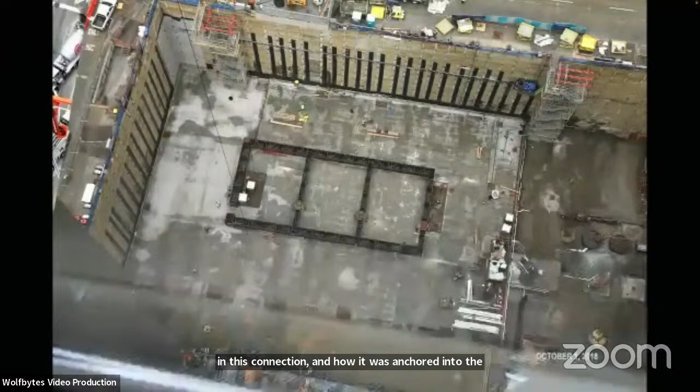Once again, a picture from my office. The mat is now cast. The wall's all set to go and ready to go vertical now.

So from this day, the day I took this picture and the steel showed up, and I have a video I'm going to show you here in a bit - from this day, which is basement number 7, remember I said we had a very huge basement, 7 basements, from basement number 7 to the roof is level 59. 59 and 7 is 66. We erected 66 floors from level 7 to the roof in 10 months.

It was originally, with the original idea of the building with a reinforced concrete core and a steel floor framing, imagined to be 20 months. So we thought we're going to save 10 months from this moment going forward.

So here we are, we started building the building and up it went. Oh, by the way, take a step back. Hello, take a step back. See the building on the right?

That's a whole seminar waiting to happen by itself.

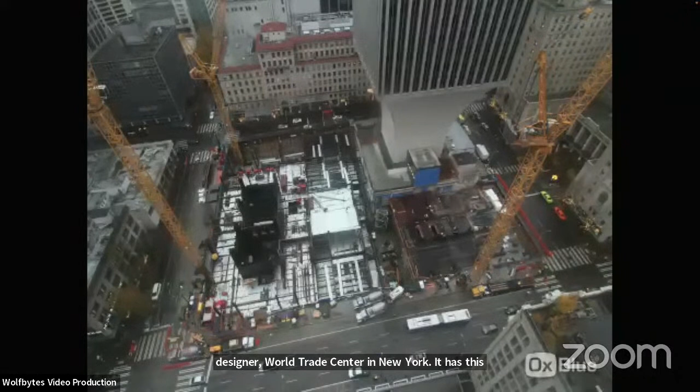That's my office in that building. It's a very famous building in Seattle, called Rainier Tower. It was designed by a very famous architect, Minoru Yamasaki, same architect that designed the World Trade Center in New York. It has this pedestal base, 12 stories tall, a very famous building. If you come to Seattle, you must go stand on the corner and do what all the other tourists do.

It's frightening, but we live there and we know it's safe, so it's fine. But I got to look out the window every day down. I live on the 32nd floor of that building, so our office is there.

So up we went with our 2-story tall columns, you see going up and the SpeedCore panels going in. And more steel erection, more typical.

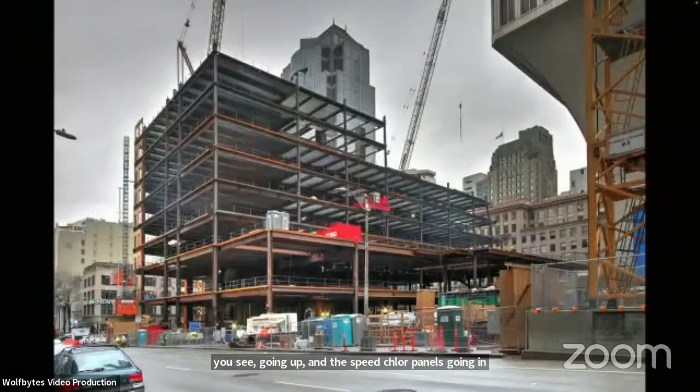Now, we talked earlier about the outrigger columns. Remember the ski pole analogy from before? The forces on those columns were also very huge, so we had to think about how to make the columns. We elected to make the columns out of the same SpeedCore assembly. In this case, the columns are 5 feet square, 5 feet by 5 feet, but made out of the same idea, same concept of a steel plate. That steel plate interconnected with cross ties, in this case in the form of a closed box.

You see all of the little dots on the side, right? Those are all the cross ties that are protruding through. So this is a 5 foot square box of 1/2-inch thick steel plate, then filled with concrete, which provided the strength and the stiffness for the outrigger columns. It's essentially the same process, same technique.

This picture gives you a few other hints. And if you look really closely, see if I can use... which button is the pointer? The red one? There we go.

If you look right there, or better yet maybe down there, you see that dark circle? That's a placing port. It's a circular hole in the side of the SpeedCore panel where we put the concrete pump. In each of the corner columns, in each of the 8 columns, there was a placing port, and we were able to put the concrete pump hose into that hole and pour the concrete in through that hole downward into the core wall panel below.

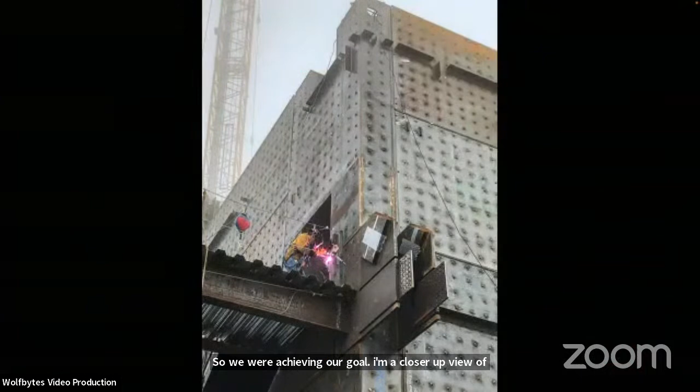Kind of a closer up view of that same thing. Dr. Varma mentioned — I'll go back a slide here for a second — one of the design considerations for us was the stability of these sections, these wall sections, in the unconcreted condition. This is actually a design parameter for the engineer to think about and the contractor to potentially inform.

On this project, in that discussion with the contractor, what we all targeted was the contractor wanted to be able to erect 8 floors of steel — not just the core, but the core, the floor beams, and all the metal deck — before having to concrete the wall. This was one of the controlling design variables for the size of the cross ties and their spacing, because it spoke to the temporary stability of the unconcreted section wall panel.

That's something you can dial up and dial down. You can say, oh, I only need 4 floors, or I want 12 floors. How many floors of construction load do you want to support with the unconcreted section is a design variable that needs to be considered overall. So again, it's not just making it strong enough, it's figuring out how to actually build it. I spent a lot of time talking to the contractor about that.

One of the other things I mentioned earlier was about the outrigger trusses and the difficulty of connecting an outrigger steel truss to a reinforced concrete wall back to another outrigger truss. In this case, all those connections were shop fabricated — all the plate sections, all the gusset plates, this big node that you see here — all of that was shop fabricated, so when it came out to the site, it was all done. It didn't slow the construction, which would otherwise have been painstakingly slow if we were trying to embed all of that in a reinforced concrete wall.

Ultimately, this is what the outrigger trusses looked like. In Seattle, because we have seismic considerations to worry about, this gray colored thing is a buckling restrained brace, whereas this is a double wide flange section. So this piece acts like a big shock absorber or a fuse in the seismic resistance system. It's designed to yield in an earthquake and have that yield be very controlled. You can see a little bit of the connections there. It's all pretty huge stuff.

And here we are, 10 months to the day. 10 months to the day from the day you saw me looking down out my window, down in the hole, to this day where the proverbial Christmas tree on the last beam goes up to the top. This was exactly 10 months to the day that we started, which is pretty miraculous. If you are involved in building buildings of any height, it's pretty miraculous that we got from -7 to level 59 in 10 months. So here's a little video.

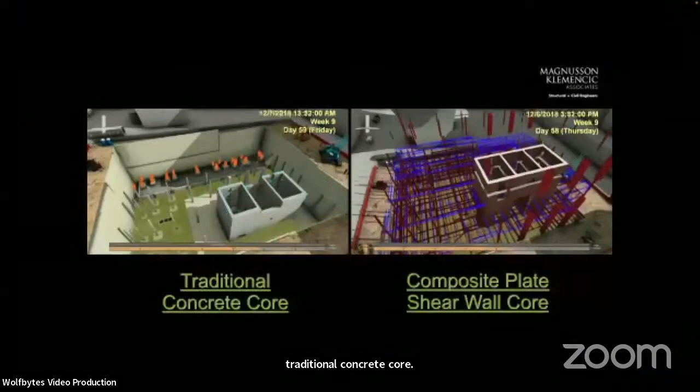Hopefully it will run. Yeah, there's a little bit of noise too with it. What we did early days to help our client understand what we were really trying to achieve is we produced this video. On the left-hand side, you see a sequence of construction where we build a traditional concrete core, traditional below-grade concrete parking garage, and then steel floor framing above.

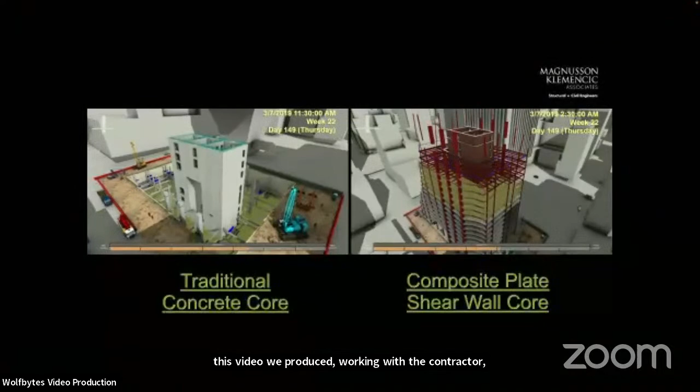And on the right-hand side was the idea of SpeedCore. How much faster might we go? The original version of this video we produced working with the contractor was based on our best guess. We thought, well, this is what we think. And so we came up with a story to share with our client that said, we think we can save 6 months. And the client said, wow, 6 months, that's huge, fantastic, proceed.

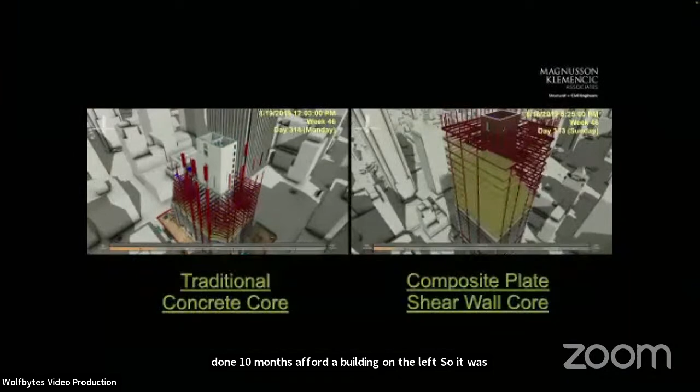This video that you're watching today, we've now altered, which is actually a record of what we did on the right. So you can see the day counter going up in the upper right-hand corner. On the right-hand image, that's the actual days and the sequence of what we did. And what you're going to find here when we're all said and done is that the building on the right was done 10 months before the building on the left. So it was kind of proof that this whole idea worked, and it worked really well.

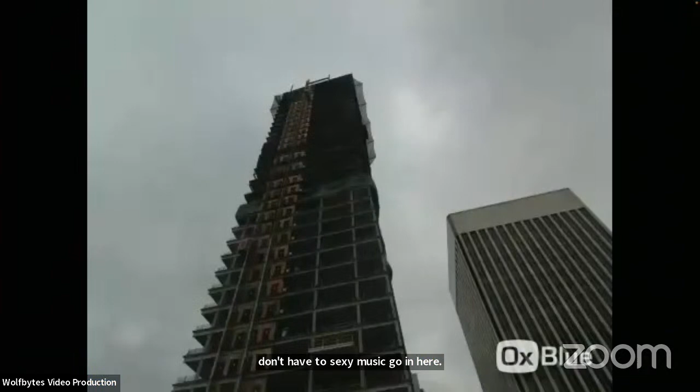So, of course, that's all magical, but that's like some animation. Some of y'all are probably from Missouri or something, so here you go. This is for real. We set up a camera on the building across the street, knowing somebody was going to be a smartass and say, well, that's a computer animation, show me the real thing. So here's the real thing. We don't have the sexy music going here, but there you go. And there is a timestamp associated with this particular stream of shots as well. So 10 months from the beginning to the end, really quite miraculous.

Since we completed this building, we've now built a second building in San Jose, California, which is a 20-story building, so not quite as tall, only a third the height. But it also saved a number of months on the schedule, and according to the contractor, at least, it saved $10 million in 3 months. This particular project didn't save any construction costs, but it saved 10 months. When you talk to a commercial building developer, 10 months of time is worth tens of millions of dollars. Just the interest on the construction loan itself is $10 million for 10 months. So it's huge, huge dollar savings as well.